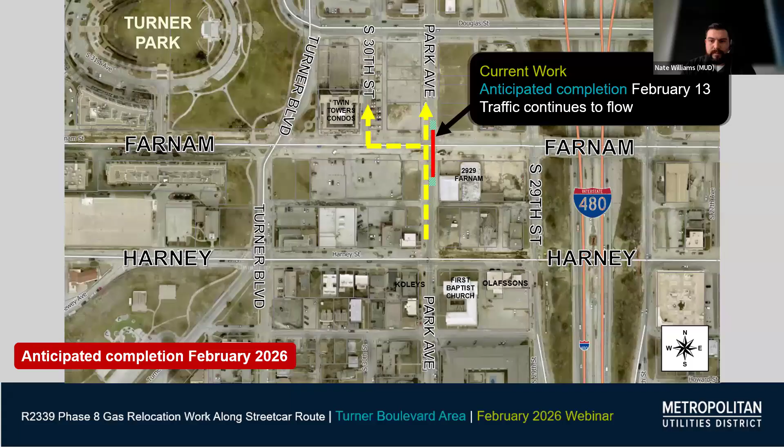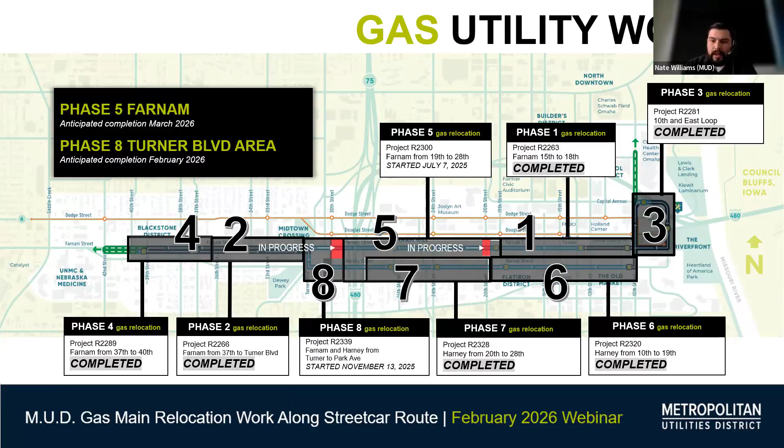I'll turn it back over to the city. Thanks, Nate, good news to hear. With that, we'll start going through the city managed construction projects, and we'll lead off with Mr. Rue on the I-480 bridges. Thanks, Mike. So we'll start off with the I-480 bridges.

Since the last update last month, we have continued the work on the 28th Street deep sewer manhole that's there. That's kind of the reason, if you're going that way, for that immediate road obstruction. So we're working through that. There's other work to do along that same corridor to finish up that sewer work. If you live in the area, you are likely aware that we are driving pile for the abutments, and the piers is being driven.

They're working through it pretty fast, so that work's progressing well. I know the noise is always a concern over there, but crews restrict work to what's allowed by the ordinance. So everything after 7 a.m., finishing up before 6. It's obviously right now it's dark, so it's a little bit shorter time period than that. That work's going really quickly, at least for the type of work that it is. So we're working right through that. We'll get to actually building this bridge here pretty soon.

Some upcoming work that we have going on, 28th and Farnam intersection. The remaining section of it going up towards Douglas is going to close next week for additional infrastructure work. We anticipate that closure lasting for 3 months. We have a signed closure, shown on the slide there.

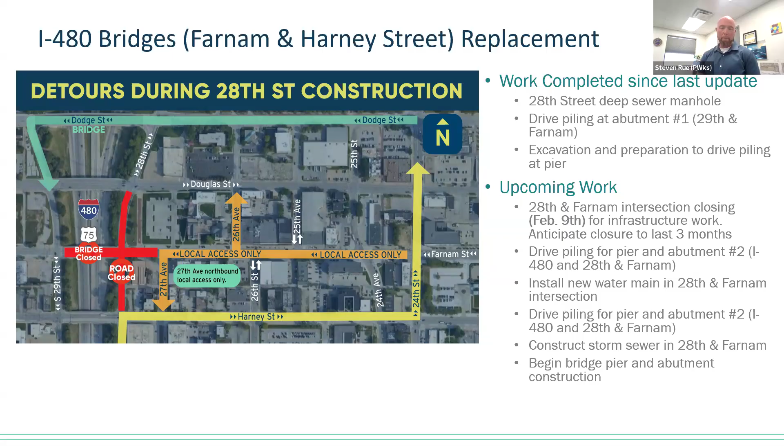East utilities package. So out of our 3 utility packages, west is complete - that's everything from Turner to the west. Everything essentially from the other side of the bridge back to the east is this east package. This is our biggest footprint package. There are a lot of moving pieces going on down here, as you can see by the number of bubbles on the screen. Some places I wanted to touch on.

16th and Harney, that intersection is closed right now. We're trying to work through that work and coordinate with some upcoming shows that we know are in that area. We're anticipating getting that back open in the next week or two. Farnam 13th to 14th is closed for that work. We are anticipating that opening up in the next week. You can see it says road opening.

12th Street at Harney, we have marked as closed. I actually do not think that is closed right now at this moment, so I think that's open right now, so you can get through there. And then we have some other closures that, Mike's going to cover some of these as we go through. There's work on 8th from Douglas to Farnam and on Capitol. Those are both related to mainline, but I understand if you're down in that area, this all just looks like construction work to you. So those are kind of like the main closures if you're down here between the utilities package and the mainline that we're looking to avoid down there.

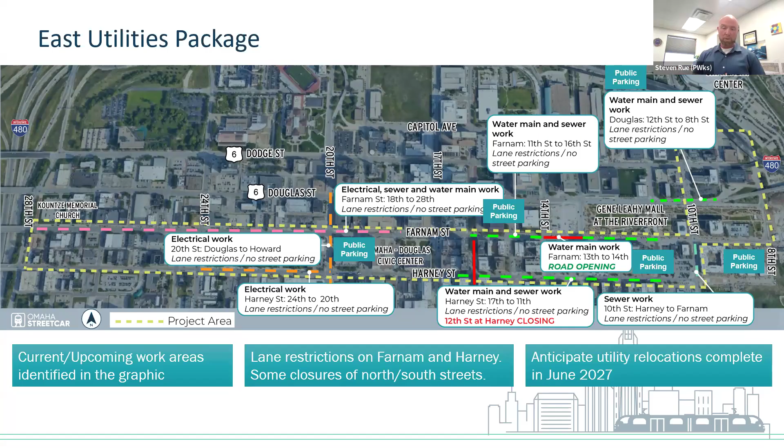Otherwise, you can see all that electrical work that's continuing out to the west. Farnam from 18th to 28th. There's a lot of work going on 24th Street right now. Our electrical contractor staying well out in front of everybody else. So that's been going really well, but it does make that spread of our work seem very wide right now. But the project's going really well - so far, I'd say it's on schedule.

Last package we have here is the Turner Boulevard utility package. Out of the three packages, this is probably our smallest footprint area, most technical. We're working in the intersection right now. There's an extremely deep sewer manhole that's going to be reconstructed through here, as well as a bunch of water main work.

So the deep sewer and water main work along Turner Boulevard and Harney from 29th is what's coming up. We started this a couple months ago. This project runs through the end of the year. Really, as the project goes, the footprint doesn't change a lot. It's kind of this very small area. It's just going to be that restriction until the end of April as we work through that deep work, get the water main in there, and then start working on paving back and opening things up.

Again, I'd like to mention, if you're trying to get to Midtown coming off of 480, we have the sign detour. There's lots of signs, so you really can't miss it. Get off on 28th, Harney, 24th, back over to the jug handle that's shown there, and then back in.

When you go to leave, I'd suggest, if possible, that you go to 33rd and utilize that light, especially if you're trying to turn left on Dodge. Right now, you can get through the park, you can go right or left there. However, it's probably just easier, especially if you're in that garage off of 33rd, to exit onto 33rd and leave that way. It'll save you a little headache. And that's kind of where we're at with those.

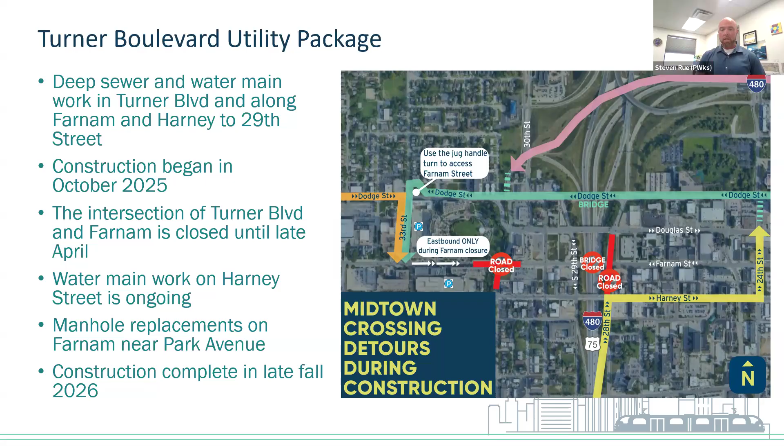Mike, I'm going to put you on the spot here. I just got off the phone at the beginning of this. We are good to go on that two-way traffic plan on Douglas, so you can kind of talk through that if you'd like to.

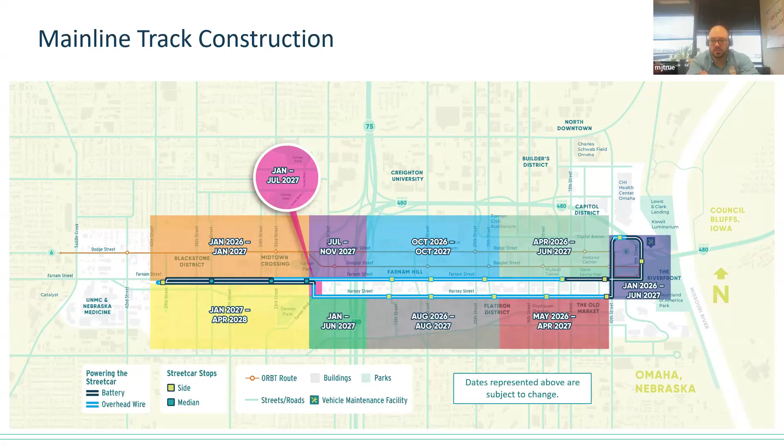All right, thank you, Steve. So just a quick update for everyone. Each of these color-coded areas is a different zone that Kiewit has. The dates on there are the approximate anticipated work date. They're currently out at the west end, west of Turner, north side of Farnam, and the east end, in and around the Capitol Loop area. As Steve just mentioned, we'll have a little update here on that.

Next slide. So just generally what to expect as we continue to go through this. Start by demolition. If you go out to these areas, you'll see that the pavement is removed, traffic controls and water barrier are up. And then in some areas, we have plates going back in to maintain access, or we just simply didn't demolish a driveway, one of the two options.

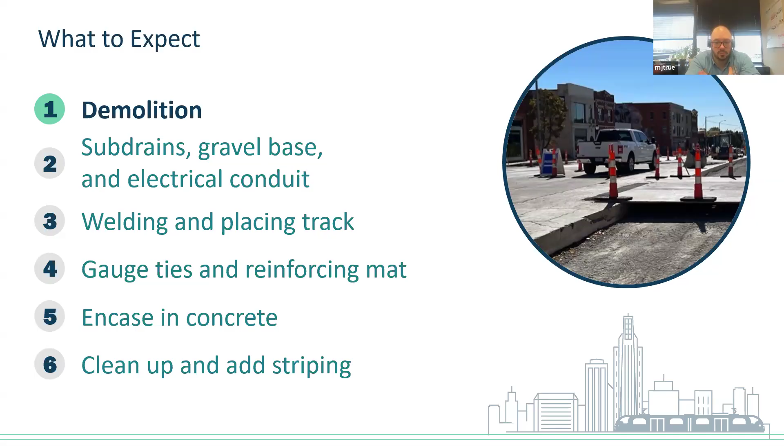Next comes a civil crew. They've kicked off this week, met a few of them on Tuesday. They go out there, they're going to be improving the drainage, improving the ground, adding gravel base, putting in some of your electrical conduit, some other power returns, and a few other items, getting everything prepped.

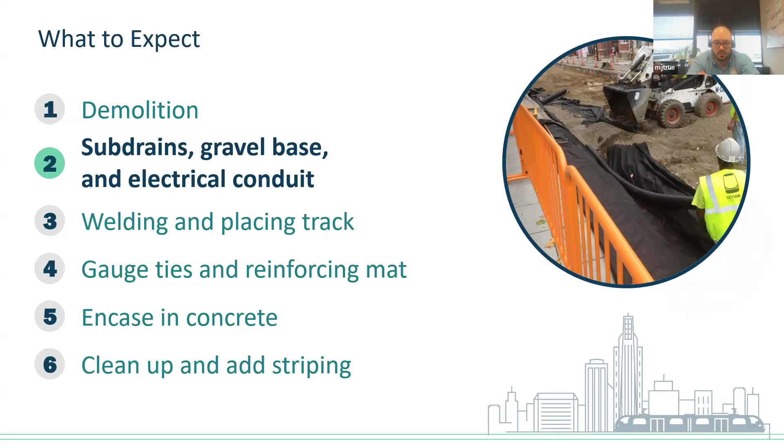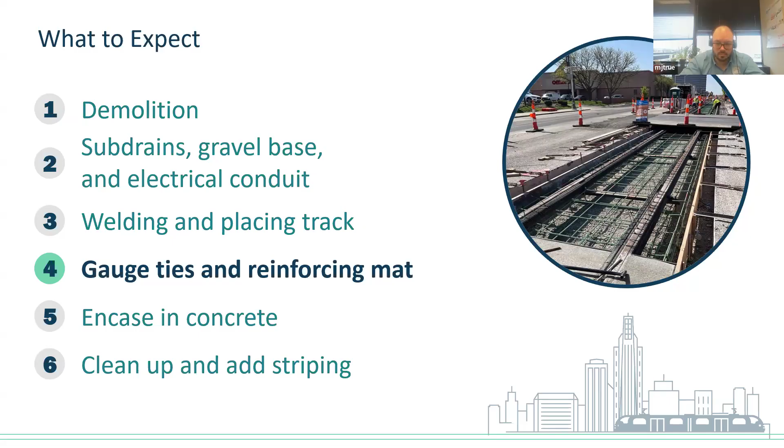After they're gone, you will have a track crew come in. Part of that track crew actually takes the 80-foot sticks that come off of a semi-truck, welds them up into 320 or 400-foot long pieces of steel that then get drug into place, and again field welded together there. They are placed into a skeletonized track. So you're going to have your rebar crew out there tying this up, making sure that the track stays exactly in place during the pour, and again for perpetuity. That all then gets encased in concrete.

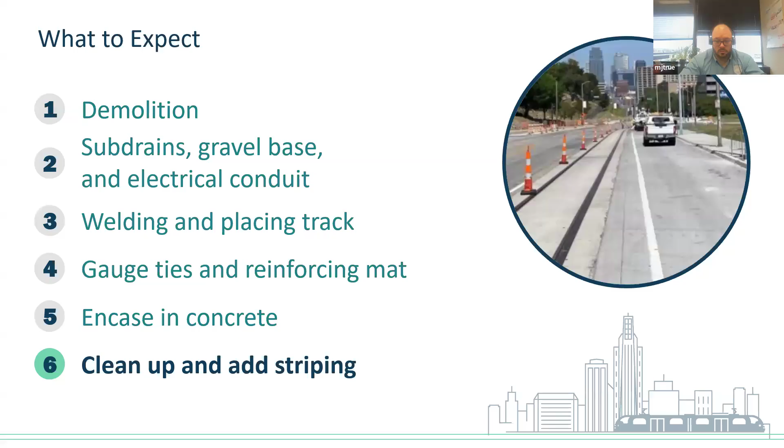As you noticed in the concrete in the previous slide, as soon as possible we do try to return traffic control back to where we can. Once concrete's cured, hardened, everything else, then comes a cleanup and striping crew, that's when you'll start to see a lot of your appurtenances go back, benches, stops, whatnot, after the track goes in. Track goes in first, stops are made last. So that's what you can expect to see as all these different ones go through.

West End, as Steve mentioned with his Turner project, Turner Boulevard is closed, so we have restricted traffic from going past 31st, turning into Turner Park. You can get into Midtown east of 33rd. It is eastbound only. You can park on the south side, and you can either utilize the 33rd Street garage, or you can go down to the garage that's just north of Harney and then exit through Harney there. Or again, if you want to park directly on the road, you can exit through Turner Park.

And they're out to about 35th right now. They've demolished up to about 34th. They're getting out there with everything else, and they'll continue to work that way. And then the civil crew is starting out on the other end, and they'll be out here soon to get their work going as well.

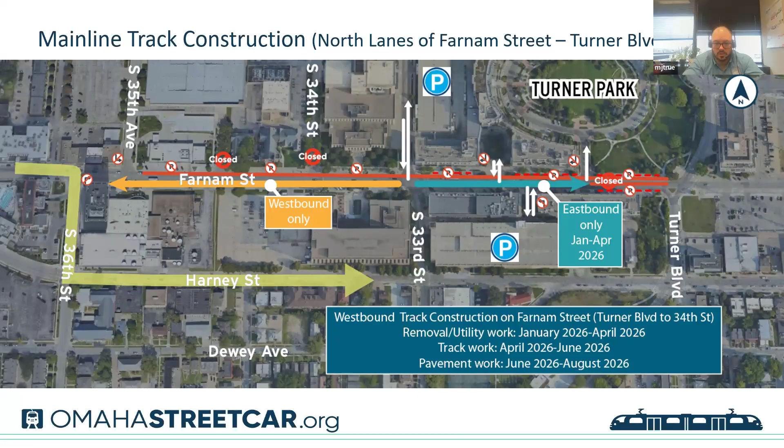This is what to expect coming up. This will begin next week, February 9th, and they'll be getting out to about 37th Street. For the rest of this project, other than this short duration in the area around Turner, it's going to be westbound only along Farnam.

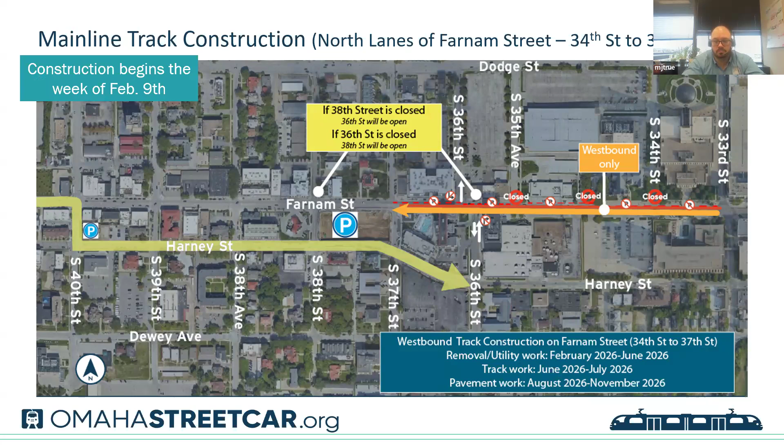Capitol Avenue - right now the turn to Capitol Avenue, if you're local traffic from 10th to 8th, that is still open, but that'll be shutting here soon. You have the alternate option to get up there - you can go down Douglas and turn up. To exit the area, you can use the right side of the screen and go out to Riverfront Drive and up to Abbott to return west.

As Steve just mentioned, we now have verbal approval from the state. We will be making Douglas Street two-way access, and we can include that in updated slides when we post this. We'll have to inform a lot of the stakeholders along here, and we'll have an updated exhibit for the next webinar. But there will now be two options: if you come down here to exit, you can go a more circuitous, scenic route on Riverfront, or Douglas Street will be two-way, and when you come back you'll have the right turn onto 10th.

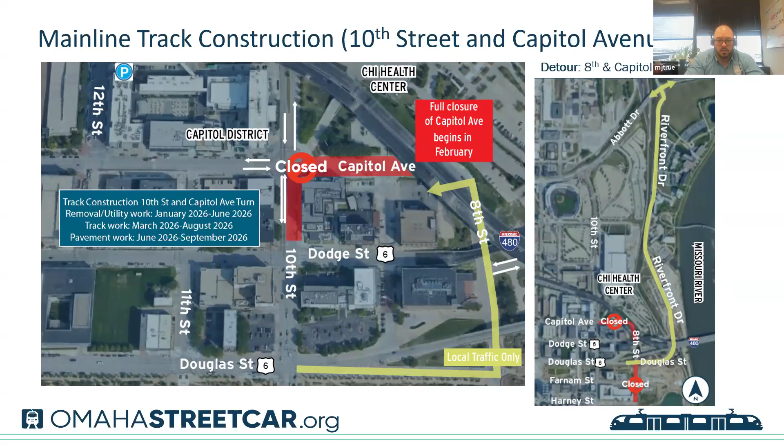This is the next closure coming up. They're going to be starting to set up barricades now. It is not fully closed along 8th Street yet - right now they're doing precursor activities, particularly potholing, trying to find other utilities, but they will have full closures there. I believe the orange and yellow arrow should be a little further up. You can get into the garage coming off of Harney, turn in, then turn back out and exit onto Harney, or you can come down Farnam, turn down, and go into the garage as well.

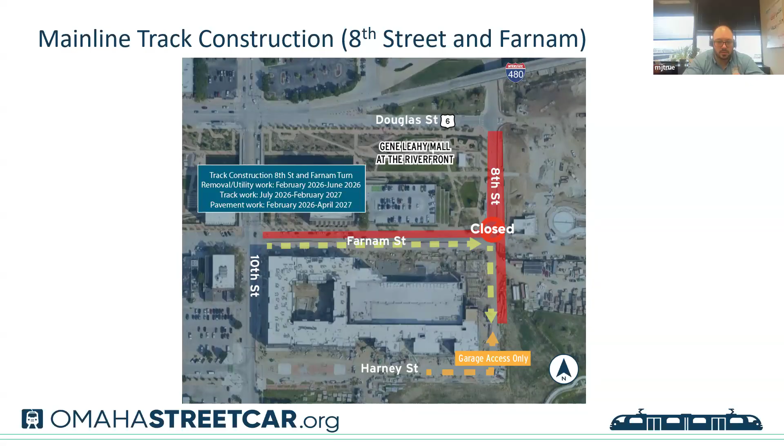Farnam will be eastbound only from 10th while this particular work is performed. This should start the week of the 9th - I believe it's the 11th. They intend to get a full closure depending on weather. Once this happens, you can see Douglas Street to the north - you'll be able to come east on that south leg of Douglas, and the intent will be to go west on the north leg. We'll get an updated exhibit included when we post this slide deck.

Vehicle maintenance facility - this is another good part of this project. All the vertical steel is up. Here's what it somewhat looks like from the inside. Last Thursday or Friday, they started swinging some of their first pieces in, and this is going to start getting closed up with the precast steel. This is on schedule. We anticipate this to be ready to start receiving OSA vehicles and really getting staffed out. This is where OSA will be headquartered here in the next 14 months, plus or minus.

Yeah, this one's been exciting. You can see the interstate behind it, and the picture on the left shows the large bay where they'll actually be working on the cars, and then back into the right shows the mezzanine area where all the office space is going to eventually be for OSA.

Construction progress - just as a reminder, we have this dashboard up on our website. As you can see, for instance on Blackstone, all the gas work is complete. In fact, most of these, as our friends at MUD pointed out, most of the gas work is completed along here. This shows you gas work, other major utility work under city contract, and the mainline work as well. So if you want to see what your neighborhood or general area is looking like, you can get a better understanding of where each of the different phases of construction activities are at.

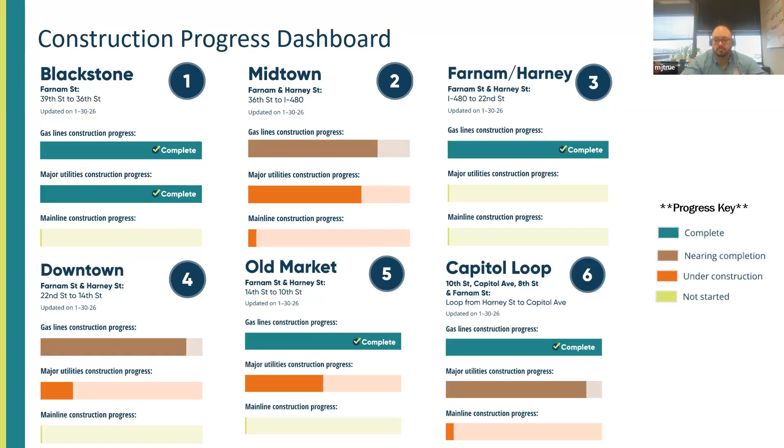We have several opportunities for public involvement and ways for you to gather information. Every Wednesday morning, we're hosting office hours at various locations from 8 to 10 a.m. Myself and at least one or two other team members will be there to answer questions. It's a very casual setting where you can come in, ask anything you want, and we will do our best to answer it on the spot. We bring maps and everything with us to show you.

Next week, we'll be at Early Bird in the Blackstone area. You can find all of our other future meeting locations on our website, and we also send those out in a weekly email. And then, of course, we have our first Wednesday of every month webinar. This is a chance for you to hear directly from Mike and Steve and all of the team members involved in this day-to-day. Our next webinar will be March 4th at noon.

Another way to get more information, if we can go to the next slide, we have our website and weekly construction updates that go out. On our website in the construction update section, you can drop down and go to the neighborhood that you're in. Every Thursday, we update that Thursday afternoon or first thing Friday morning with what the next week will look like. You can also sign up and get that information through an email newsletter that goes out each week.

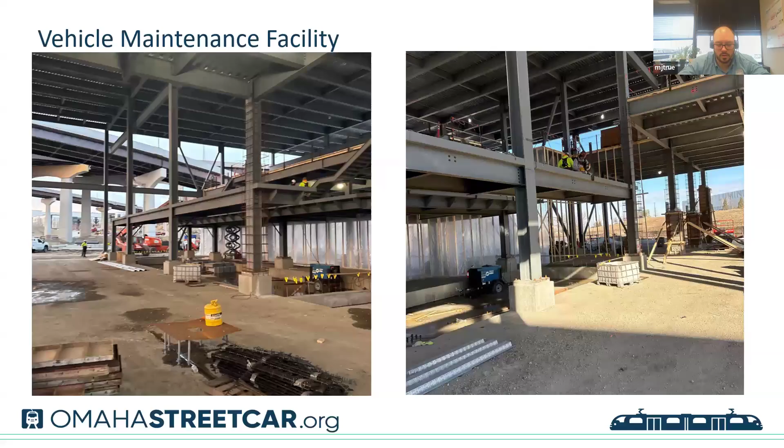I actually did just get a late question. It says, Mike, can you cover the track work in Blackstone, 39th Street again? Yeah, we can. If you can pull up that slide again, real quick, in and around the intersection just west of 42nd and Farnam on the north block of Farnam, we're going to have, on the farthest left side of your screen, that orange arrow pointing to where it'll wind up being after it's welded up. We're coordinating with the entities along there, along with Kiewit Building Group, which is different than their construction group for this particular type of civil work. Access to that area, we're going to go in, weld it up, and then pull it to the other side of 42nd Street, and that'll be the rail stockpile for everything west of Turner, everything in the two-way pair. So I'm not entirely certain if you have a more specific part of that, but essentially it's going to be 80 feet and then it gets welded into longer sections and sits in the north parking lane or parking area.